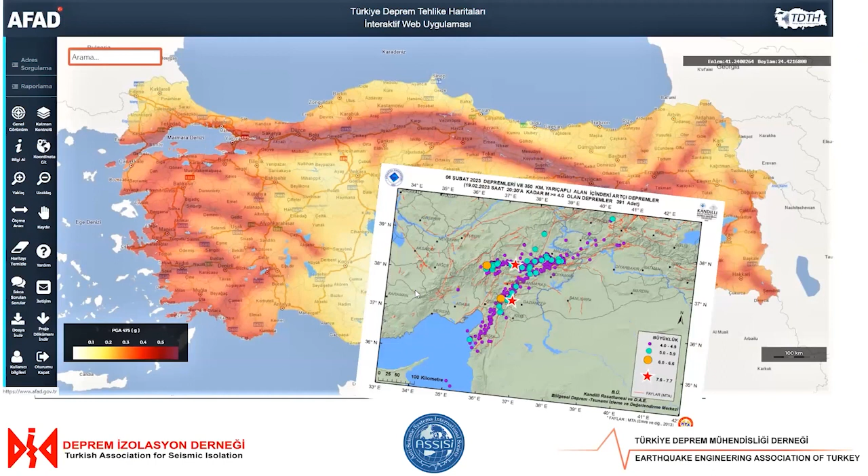And let's take a closer look, and maybe I can show you which earthquake corresponds to what kind of spectral values. Here, this one is from Kahramanmaraş, Pazarcık area. On the top, you can see the recorded wave. And here you can see the spectrum. The black lines here are the design spectrums. In the Turkish seismic code, the design spectra change depending on the soil type. But anyway, the maximum points are around 1 and a little bit over 1G.

But the observed spectrum acceleration values are a little bit higher than almost 5G in the short period area. Similar observations can be made for peak ground velocities or the velocity spectrum. So you can see that the velocities are over 200 centimeters per second, which is quite large.

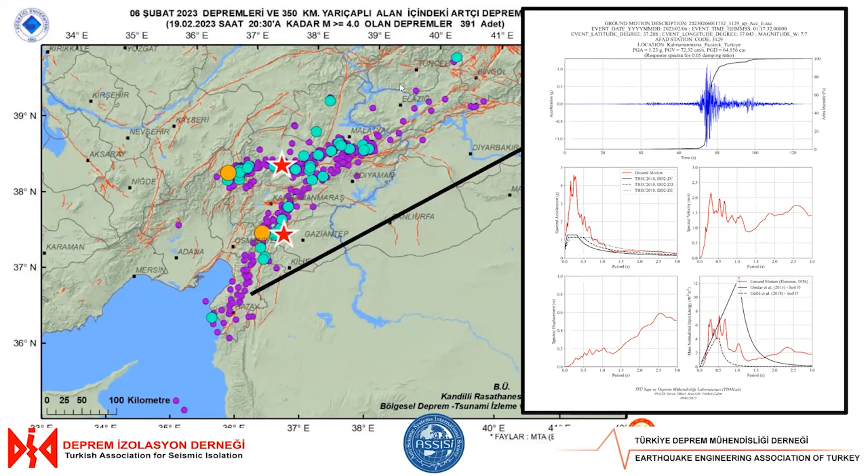Maybe we don't need to discuss the displacements, but the accelerations and the velocities are obviously very devastating. This study is made by Professor Çelik and his colleagues from Technical University Department of Architecture. Okay, as AFAD, the emergency agency, has announced, there are more than 11,000 collapsed buildings. But together with the collapsed buildings, we should also consider the heavily damaged buildings, because all these buildings have to be reconstructed.

I will very shortly talk about what kind of damages were observed. This first one is considered as minimal damage, where the structural system is intact, but the partition walls or some other secondary members are damaged. Of course, there were some cases where the partition walls or the infill walls were just slightly separated from the structural system, which is acceptable.

But here there are some cases where the facade of the structure or the internal walls are completely collapsed. This is considered as minimal damage, but actually these buildings cannot be used anymore. I mean, the structures survived, but I'm not sure if these buildings can be considered as homes anymore.

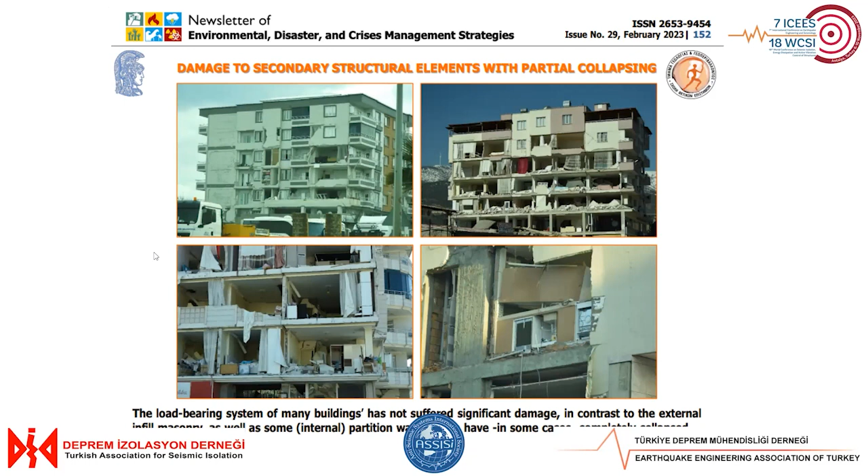These ones are middle to heavy damages. Of course, mostly like this tilted building, it's obviously a heavy damage. This one cannot be used anymore. There's lots of residual deformations and lots of heavy damage in structural members. Here we can see a soft story which completely collapsed.

And here there's an interesting one, like these three buildings were adjacent to each other. So there were no gaps in between. And there was pounding or hammering between these structures. At the same time, the first two floors of this middle building have completely collapsed because of the soft story mechanism.

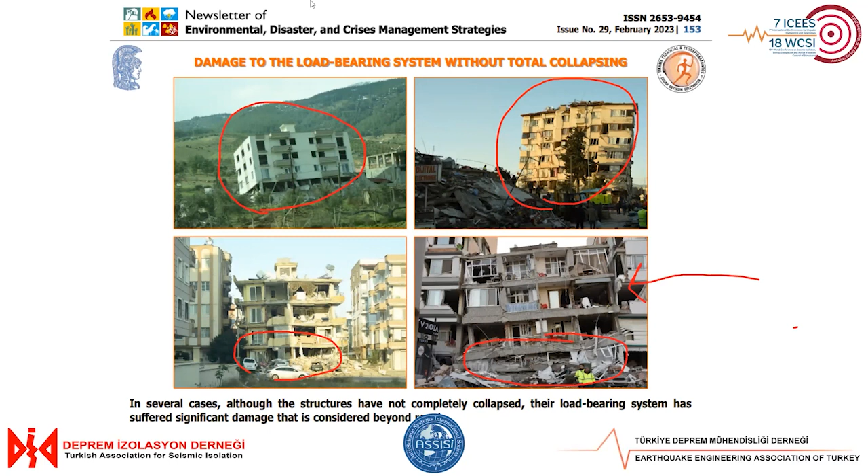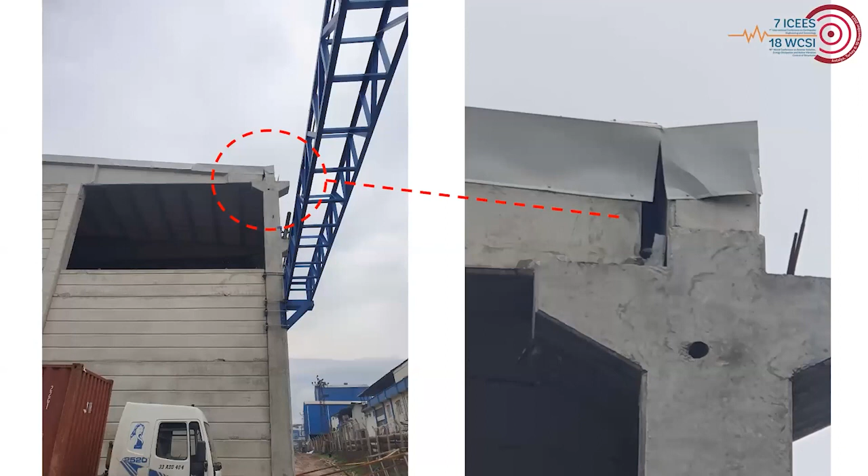In Maraş area, we have visited lots of industrial areas, and the biggest problem with the industrial areas are the connections. Here you can see a precast column here, and there's the precast beam here, and the connection is very poor. This is a good example, actually. It just dislocated a little bit. There are some pins here, but in many cases, this very heavy precast beam has completely collapsed or fell over the machinery or the equipment inside the building.

And these kind of buildings can easily be retrofitted by using conventional methods, and their performance can be improved by using some dampers, because as you see, these kind of joints can benefit from some energy dissipating devices.

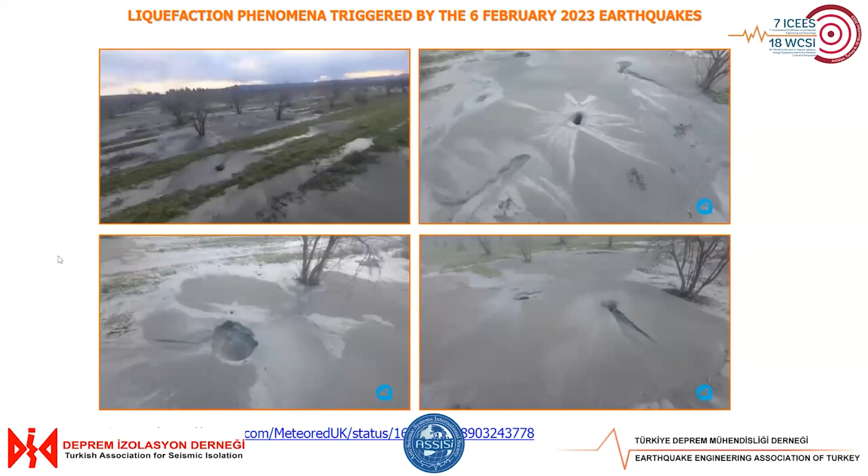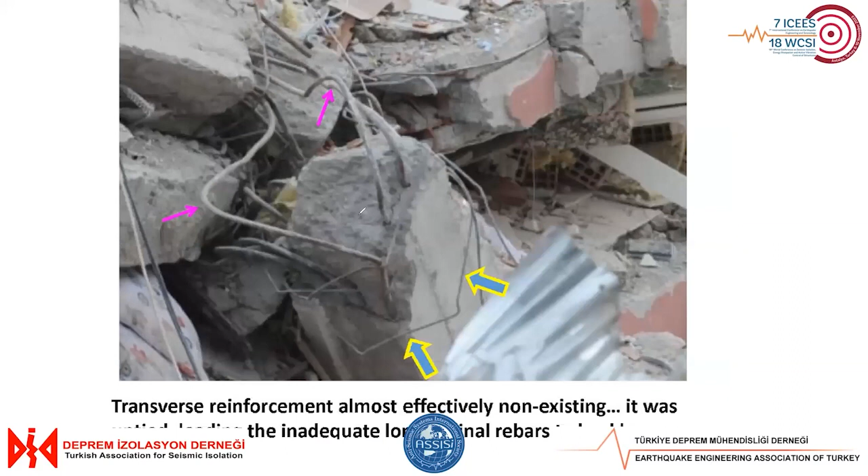And here are some examples why these kind of pancake type collapses happen. Let's take a closer look. There are several reasons. First, these are round bars. You see, they are not deformed bars, and the stirrups are very weak, and the number is insufficient, and there are no hooks. The concrete condition is not good.

The amount of rebars is not good. The rebar detailing is not good. And again, here, the columns are, in most cases, weaker than the beams that they are connected to.

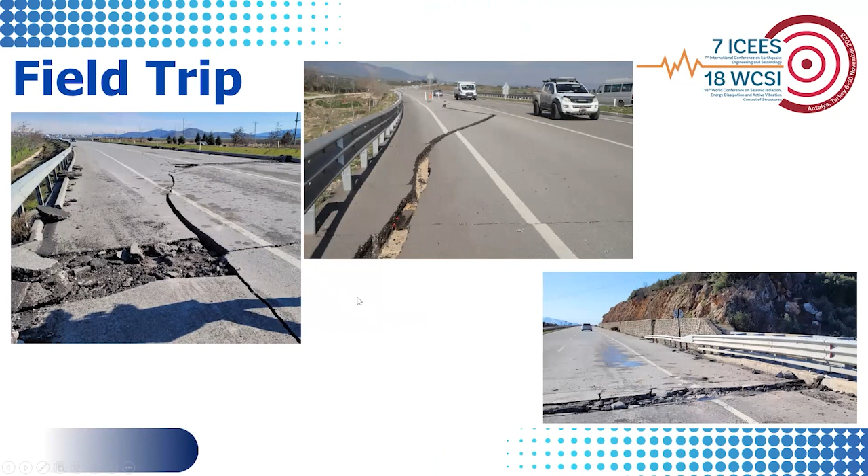And generally, the main issue when we were trying to visit the area was the disrupted roads. So we had to use some off-road type of cars to pass these issues on the site. And when we had some earthquake records, we wanted to focus on where the damage is heavily focused. Hatay and Kahramanmaraş were the main interest for us, but we also wanted to see the Adana region, which was slightly affected.

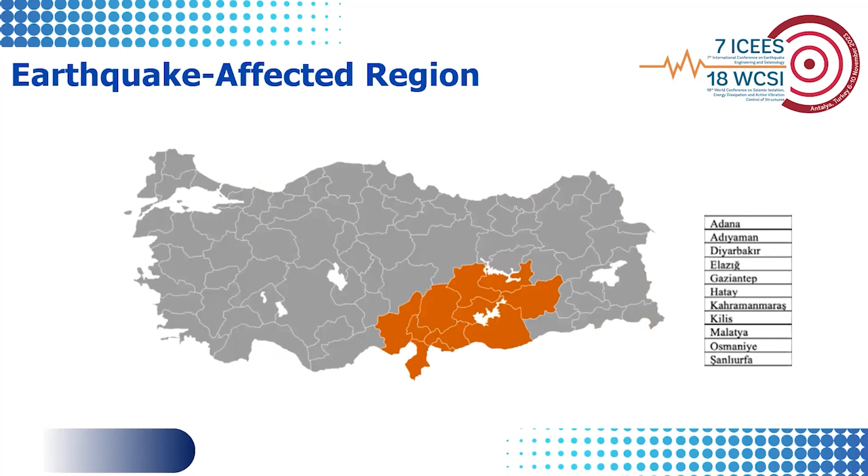So this is the seismic hazard map, as Dr. Sütçü just mentioned, and 11 provinces were affected by these earthquakes. When we make a classification, we can say that Hatay, Gaziantep, and Kahramanmaraş are the main provinces that are heavily damaged. Moderately damaged provinces are Malatya and Adıyaman. The low damaged provinces are, for example, Adana, Diyarbakır, Osmaniye, Şanlıurfa, Elazığ, and Kilis.

Interestingly, in Adana, for example, we have total collapses. 11 buildings were totally collapsed, and some of those buildings were 16-story, 14-story, and it was surprising for so many people. And some of those buildings were constructed in 2005.

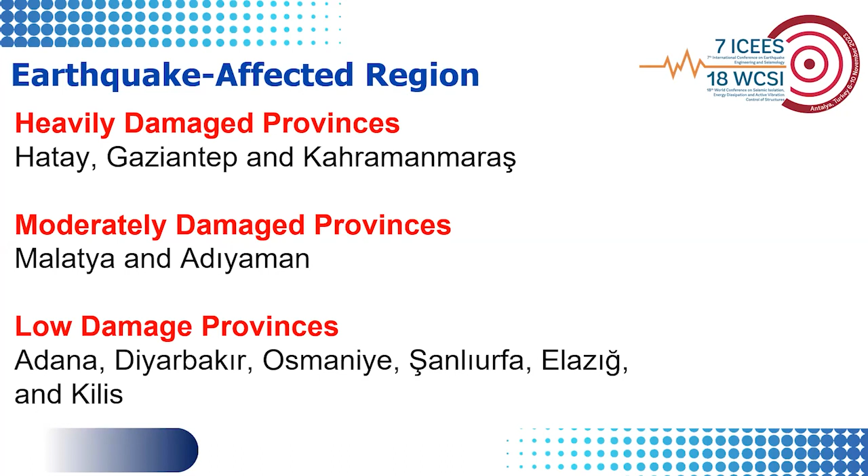On February 16, this data was shared by the Ministry of Environment, Urbanization and Climate Change. And as you can see, the total number of damages is significant when you consider the moderate and the heavily damaged. We were not expecting such an extensive damage in that region.

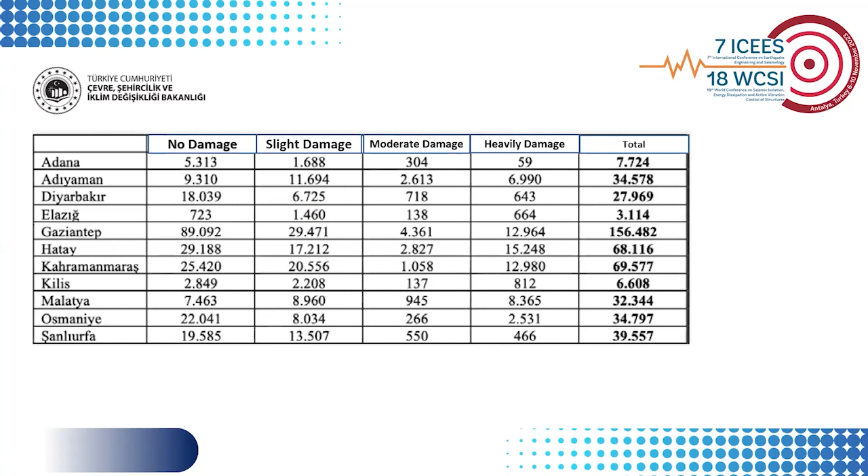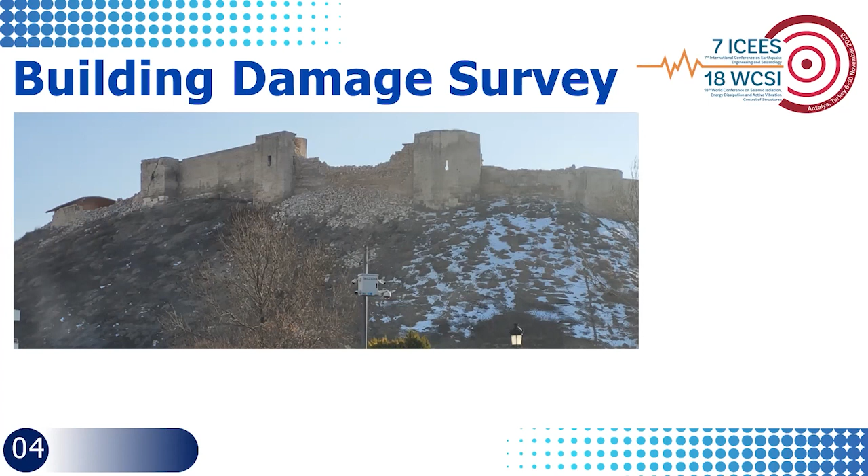I would like to show you some damage survey photos. Of course, I will not get into very detailed information about the technical aspects, but later during the conferences, we will get into detail. This is the Gaziantep castle, which was damaged during the earthquake. Also in the Gaziantep region, we have the Nurdağı region. We have 2-story and also some multi-story buildings up to 8 or 10 stories.

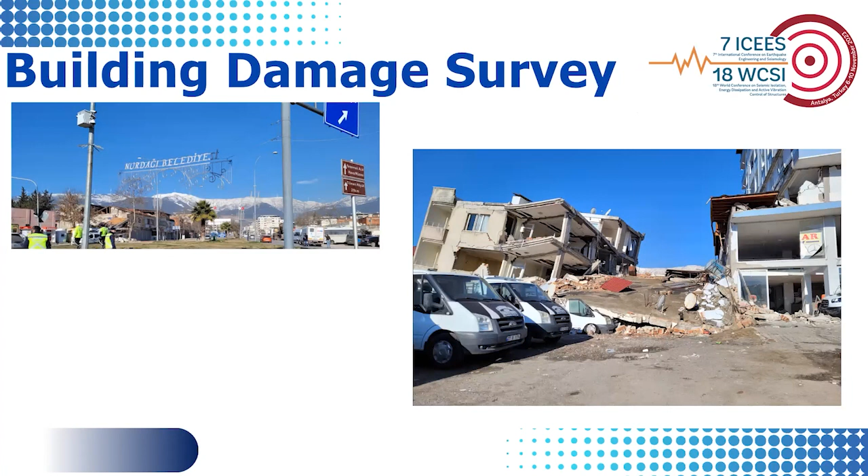And the most common damage that we were observing was the soft story related damages. Also, in the first 2-3 days, we saw this type of scene a lot, the pancake collapse, but the soft story collapses were also really common and widespread, as you can see in these photos.

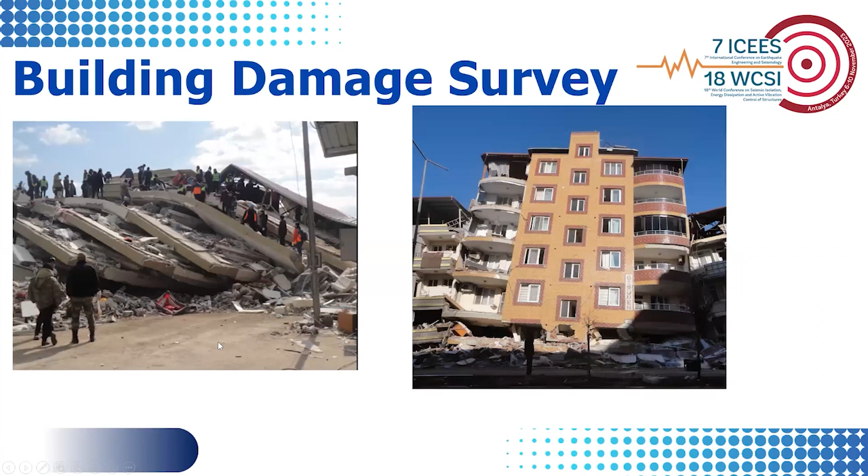In addition, I would like to show that the unreinforced masonry infill walls created a lot of damage, not only to the structural system, but also to the cars. Most of them were smashed due to these unreinforced masonry infill walls. So there are some lessons that we can learn, but the same type of damages were seen in all earthquakes that we have experienced since the 1999 Kocaeli earthquake.

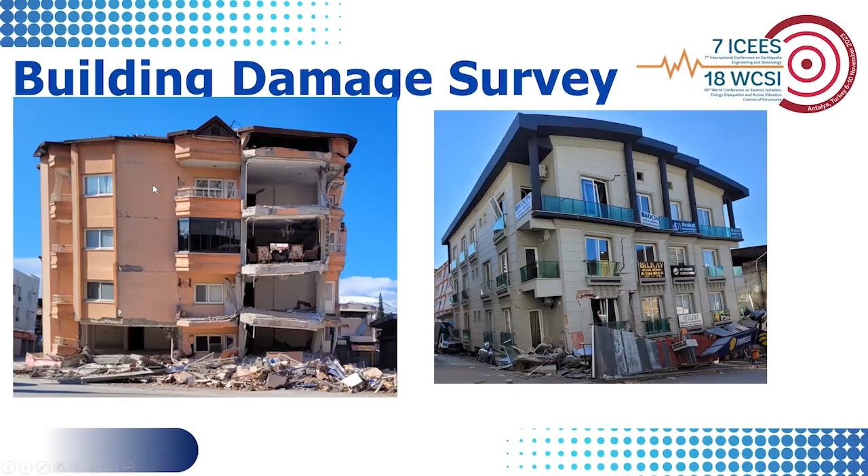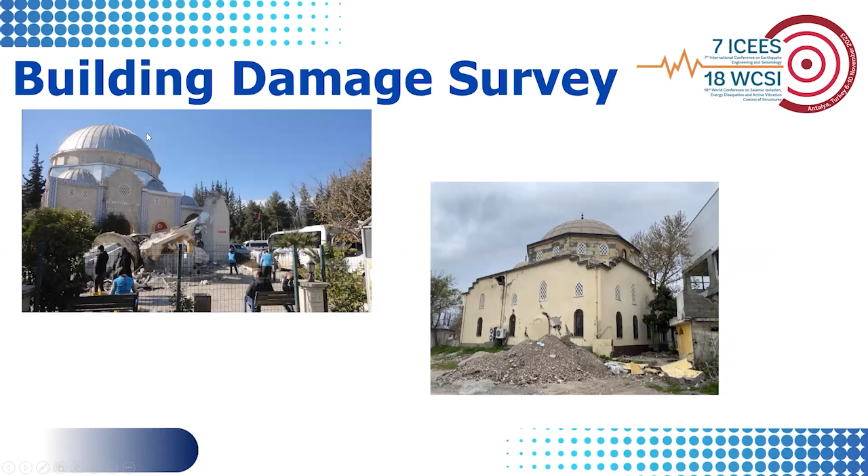Also, temples. Some of the mosques, as you can see, have slender structures such as the minarets, and they were totally collapsed. In the Hatay region, we have heavy damages; Hatay was the most heavily damaged region due to many reasons. We cannot attribute this damage only to the soil or only to directivity related situations or some source characteristics. So many things were gathered together, and we have to look at these things in a very broad perspective.

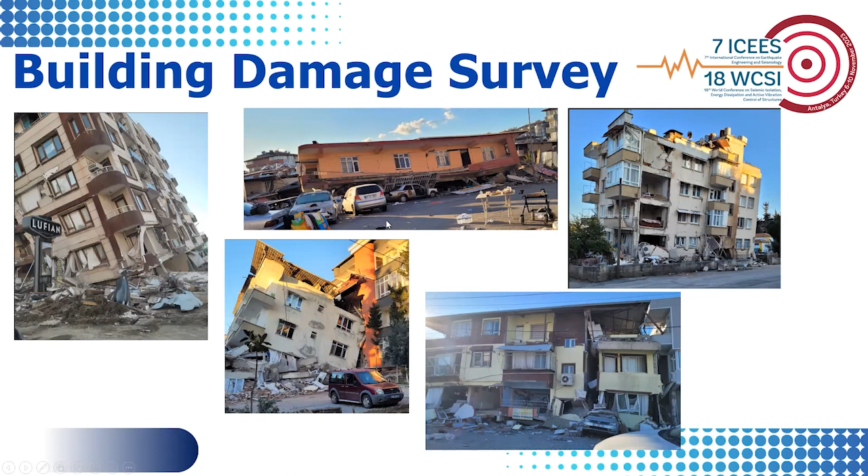Kahramanmaraş: when we were making our first visit, we went to the area at nighttime, and it was really like a nightmare, I should say, and it was very risky. The roads were really narrow, and the aftershocks were creating really huge problems. Most of the buildings were heavily damaged.

But also in Kahramanmaraş, there was a very interesting structure that was featured in all broadcasts, this building belonging to the chamber of civil engineers. Nothing was special about this building. We went there and made some surveys about it. Nothing so special. They only followed the building code regulations, and the buildings surrounding this 3-story building were damaged.

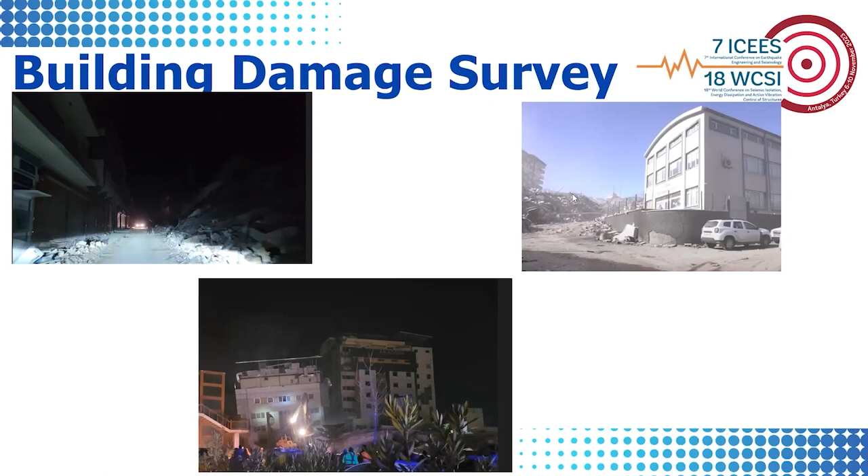And when we made some interviews with the locals, they said that the old city had slight damages when you compare this region. So there was a big distinction between the newly constructed area and the old settlement of Kahramanmaraş. Also, there were some surface ruptures we found in several areas, but I will not get into detail because the geotechnical aspects were already discussed.

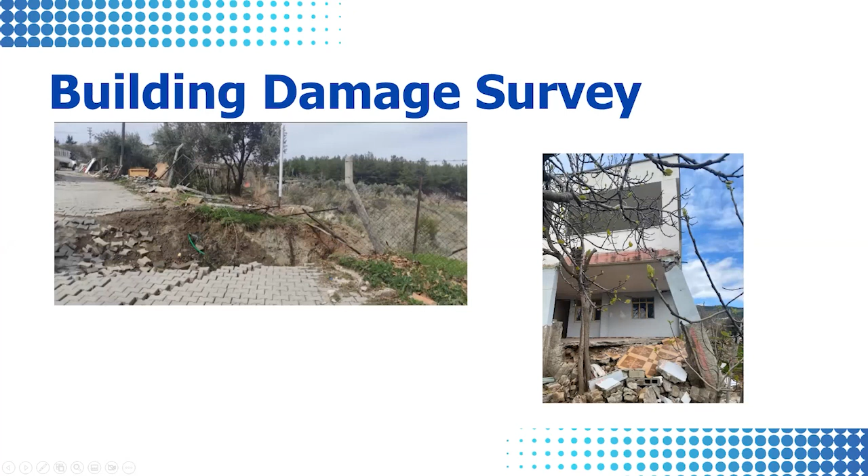But when we checked out the structures, most of the structures did not have any engineering treatment. Generally, they were built by the people who live in the village. And when you compare the seismic detailing, so many things were deficient in those structures.

Apart from that, we also made some surveys of the industrial structures. This was our second visit to the earthquake-affected region. In the industrial zone, we found some steel structures. Most of them were not really affected, only one steel structure, but it was related to a fire-related issue.

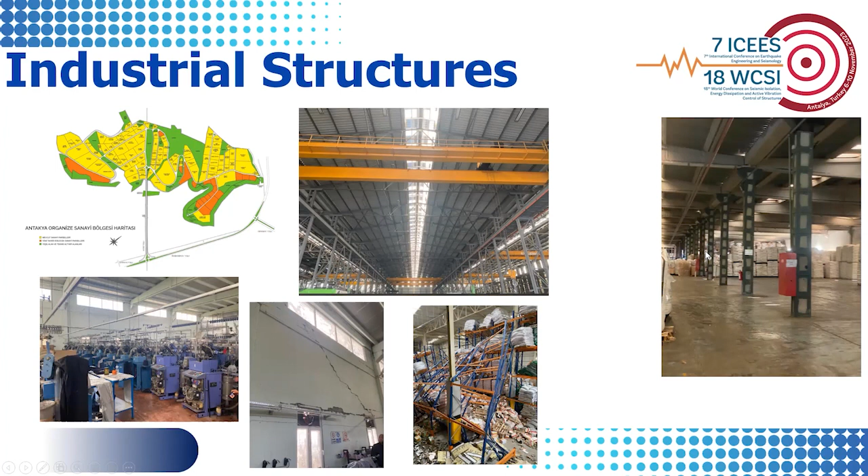They all performed quite well, but for example, when you check out the precast structures, as Dr. Sütçü mentioned, the connection details were poor. In addition, there was some loss of functionality and they could not make the factories work properly. Also, the racks, as you can see, created a huge amount of losses. And on the right side here, you can see the retrofitted structure, which also had some moderate damages.

But when we made a comparison with the seismically isolated hospital buildings, we see that they performed quite well, and Dr. Şadan will make the presentation about seismic isolation, so I will not get into detail about it. But what we have seen was a success story of the seismically isolated structures. Also, even conventional fixed-base structures performed quite well as a structural system. So the main issue was related to the non-structural components, which made some of the hospital buildings lose functionality, or led them to evacuate the buildings.

So there are some concluding remarks. The main issue related to building performance is the low-quality concrete production prior to the use of ready-mix concrete. Additionally, there were widespread reinforcement detailing deficiencies, bond slip effects due to the use of plain steel reinforcing bars, inadequate lap splices at the column and wall bases, inadequate spacing of the transverse reinforcement, lack of cross ties and 135-degree hooked stirrups even in newly constructed damaged buildings, and use of smaller diameter reinforcing bars that created detailing issues for placing the concrete, and buckling of the longitudinal bars.

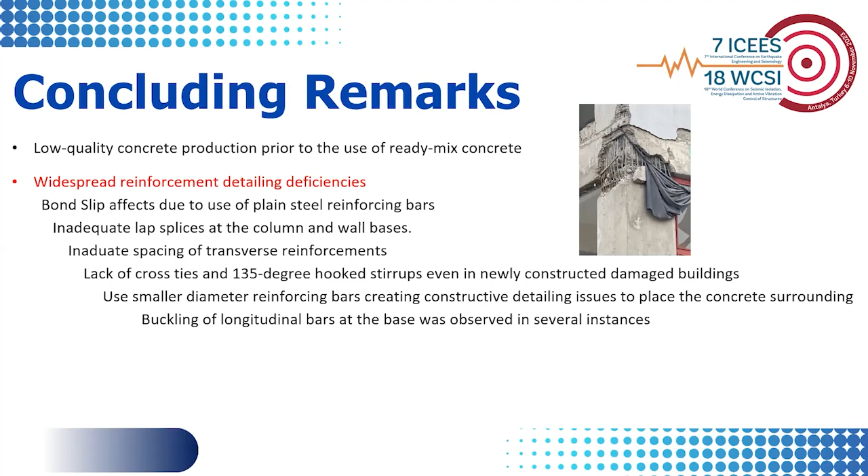In addition, as I expressed, the non-structural components and systems created problems, such as suspended ceiling systems, as well as the usage of the ground floors as offices or shops. They created a lot of problems, and such slender elements had some non-structural components, and we have to think about how to reduce such damages by creating special connection details for such systems.